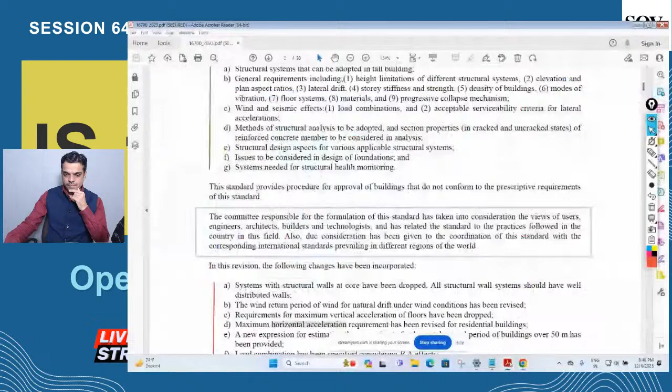Firstly, let's talk about the revisions or changes made in the document, which are highlighted here. Let's go through this quickly, then locate these parts in the document. One major change: the system with only core structural walls is dropped. Now the structural wall system should have well distributed walls only; there is no option of only core structural walls as was available earlier.

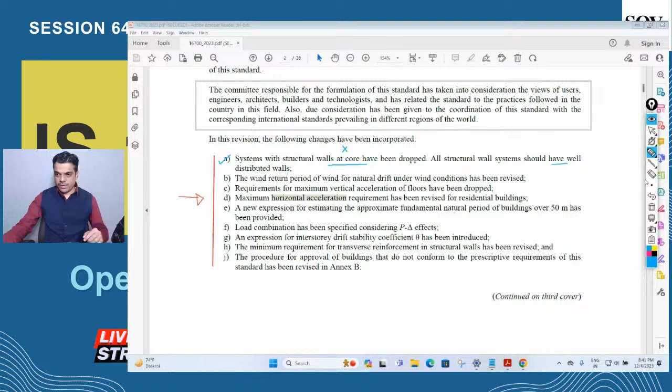Just let me fix this a bit. So as we were discussing, the core part of structural walls - only exclusively core walls are now not allowed. That is one of the changes.

Let's look at other changes. Second, the return period of wind for natural drift under wind conditions has been revised. Third, requirements for maximum vertical acceleration of floors have been dropped, which were there in the earlier part of the document. Maximum horizontal acceleration requirement has been revised for residential buildings. Part E is a major change - a new expression for estimating the approximate fundamental natural period of buildings over 50 meters has been provided, and we'll see this equation where there is no relation with reference to the base dimensions.

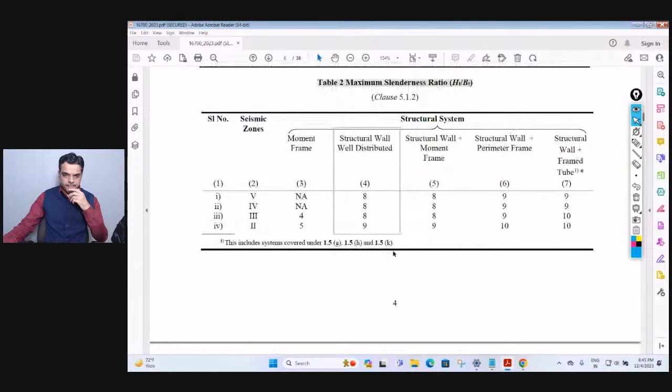Let's quickly locate a few parts where changes have been made. In this table, earlier the option was for core structural wall as well as a second option for structural wall which is well distributed. Now the core structural wall option is removed and is not allowed. It's mentioned here that structural walls are considered well distributed when structural walls outside of the core are capable of carrying at least 25 percent of the lateral loads - that requirement is specified.

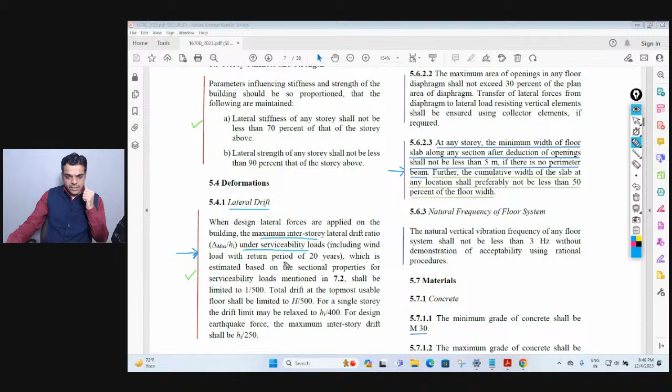For lateral drift, the maximum interstory lateral drift ratio under serviceability loads, including wind load with a return period of now 20 years, is estimated based on sectional properties - stiffness modifiers specified in 7.2. That shall be 1 divided by 500. I'm trying to locate the changes as I've studied this document, so please feel free to populate the chat with whatever additional things you've observed.

There's also another change regarding diaphragm action for earthquake resistant design. Now it's specified that at any story, the minimum width of floor slab along any section, after deduction of the opening, shall not be less than 5 meters. This clause applies when we do not have the perimeter beam - in that case, the minimum width of the floor slab along any section after deduction of the opening shall not be less than 5 meters.

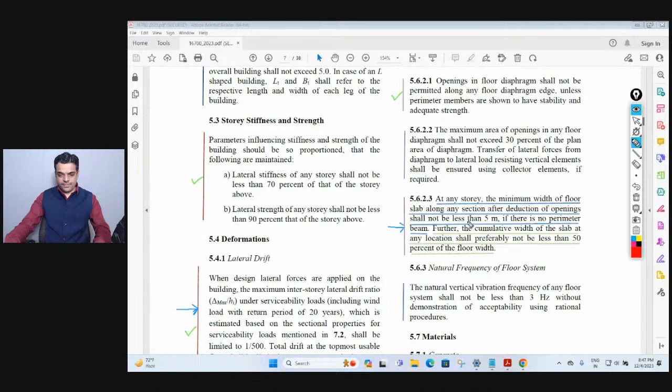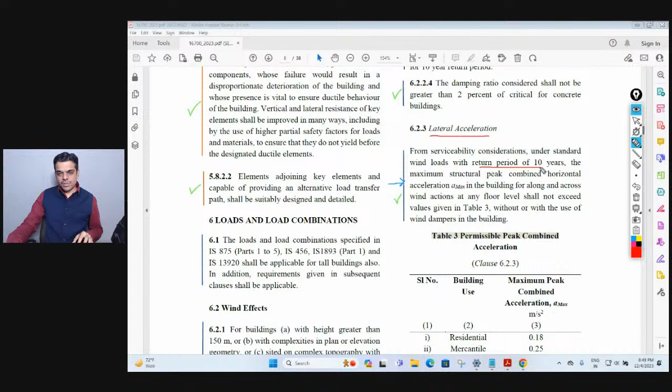Related to lateral acceleration, from serviceability considerations under standard wind loads with a return period of 10 years, the maximum structural peak combined horizontal acceleration in the building for along and across wind directions at any floor level shall not exceed the values given in Table 3. So Table 3 identifies the maximum allowable peak combined acceleration.

In para 6.3.2, it is said that for buildings in seismic zone 5, deterministic site specific design spectra may preferably be estimated and used in design. So it is said that it may be used, because of certain practical difficulties. It is recommended that we use deterministic site specific design spectra whenever buildings are located in seismic zone 5. But the statement has been updated, and it is now mentioned as 'may preferably be considered or estimated'.

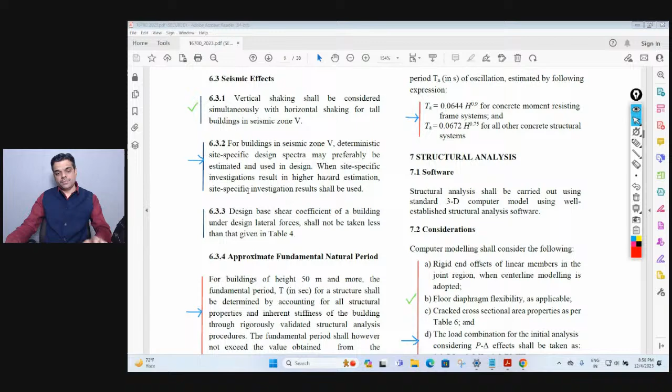Para number 6.3.4 is one of the major changes we can say, related to fundamental natural time period. As we were discussing in a number of sessions, our formulas related to time period in different Indian Standard Codes need to be revisited. Here also we could see that changes are proposed. For buildings greater than 50 meters, the recommended formula no longer has any dependency on the base dimensions. So this is one of the major changes made in this document.

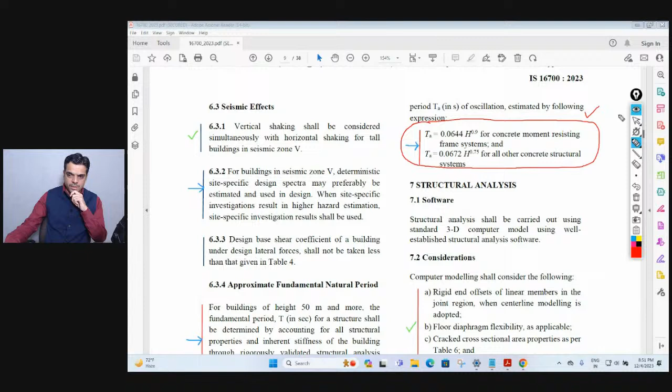Regarding P-delta analysis, as we discussed in the initial part of this session, there is always confusion related to P-delta analysis - what load combinations to consider and how it is to be considered in the software. That's a different point of discussion which we'll cover in detail in a separate session. But now there is a change made in the document wherein the load combinations are identified for P-delta analysis, which is nothing but 1.2 times dead load, 0.5 times live load, and 1.5 times either seismic load or wind load.

In para number 7.3.10, the flexibility of the building shall be such that the inter-story drift stability coefficient, denoted as theta, shall satisfy the following condition. The equation is given, and whatever value we derive out of this shall be less than or equal to 0.2. So this is also one of the changes.

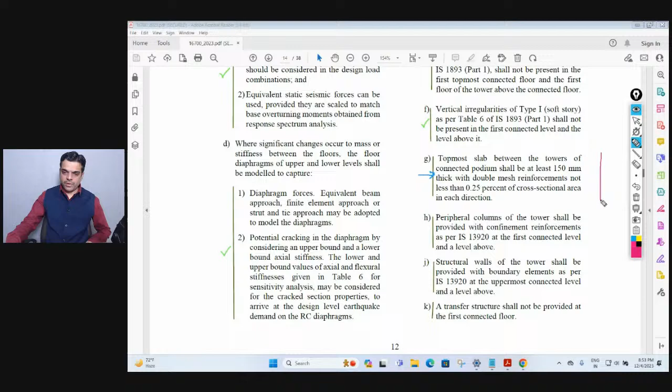I think here one change is made related to the topmost slab between towers of a connected podium, which shall be at least 150 thick with double mesh reinforcement, not less than 0.25 percentage cross sectional area in each direction.

Then in para number 8.5.13, it talks about reinforcement requirement for the structural wall. The minimum longitudinal reinforcement in the structural wall shall not be less than 0.4 percentage of the gross cross-sectional area. And the minimum transverse reinforcement in the structural walls shall not be less than 0.25 percentage of the gross cross-sectional area.

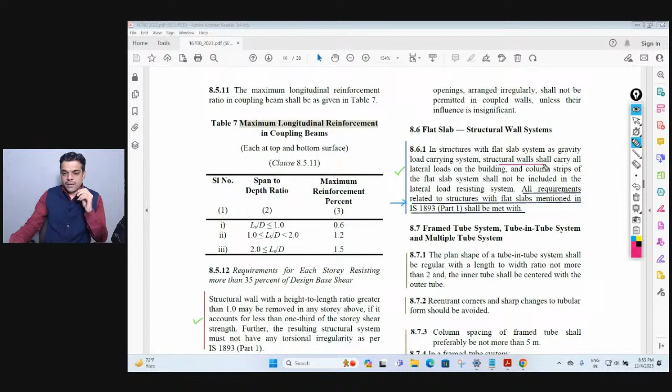Now we know that flat slab structures don't perform well during seismic events. So it's written very clearly here that wherever the structure has a flat slab system as the gravity load carrying system, the structural wall shall carry all lateral loads on the building, and the column strips of the flat slab system shall not be included in the lateral load resisting system.

But what is the change made in paragraph 8.6.1? Now it is said that all requirements related to structures with flat slabs, mentioned in IS 1893 Part 1, shall be met with. So the requirements related to drift, punching shear, etc., whatever is mentioned in IS 1893 Part 1, shall be considered while designing structures using flat slabs. So here reference is given to 1893 Part 1.

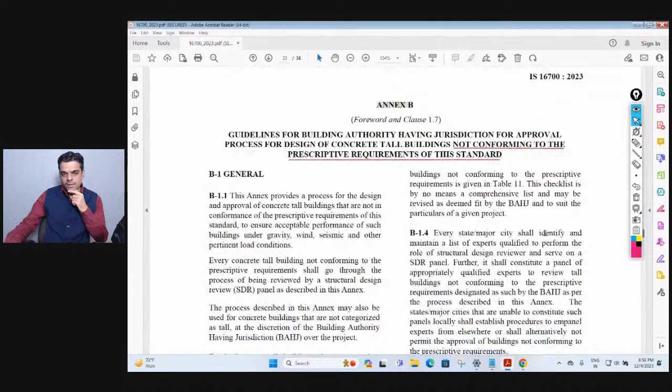The final change is in annexure B. Wherever a tall building is not meeting the prescriptive requirements of this document, earlier it was considered as a code-exceeding building or code-exceeding structure. But now that nomenclature is changed, and it is said that it's not conforming to the prescriptive requirements of this standard. So when the building doesn't meet the prescriptive requirements, the procedure outlined in annexure B has to be followed.

So now there are changes. One of the paragraphs related to performance-based design is now removed, as I could see, for more clarity. And it gives the overall or general process whenever a building is not meeting the prescriptive requirements.

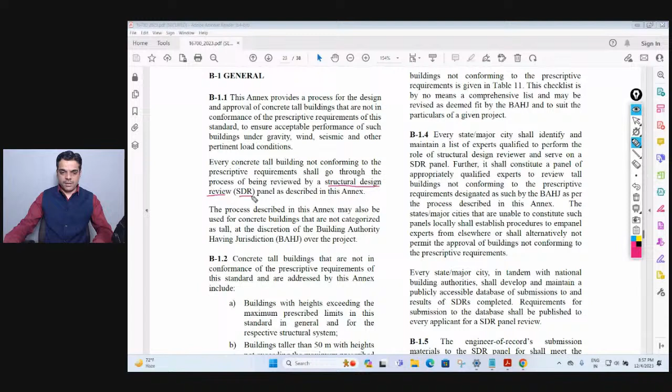One more change we could see here: two nomenclatures are given - SDR, the structural design review panel, and BAHJ, the building authority having jurisdiction. So everywhere these short forms are mentioned in the document. This is what I could gather as a quick overview of the changes made in this revised document.

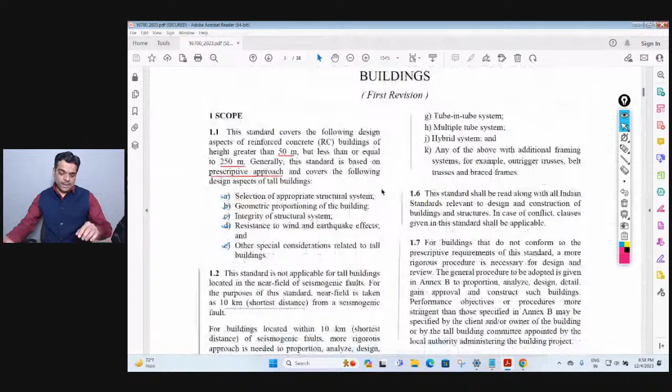Now let's move to the second part of our discussion, where let me highlight quickly the important points related to software applications while performing the design of tall buildings with reference to this document.

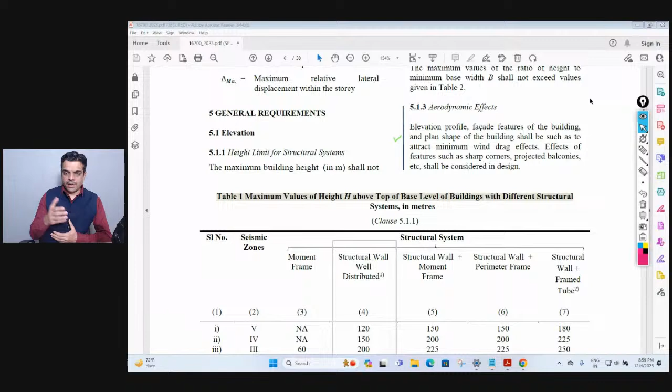As we discussed in the initial part of the session, we'll highlight a few of the important points which I have gathered while studying this document. We are still studying this document and will refine our list of those points. But right now, we'll just highlight the points which need to be considered from the software application point of view.

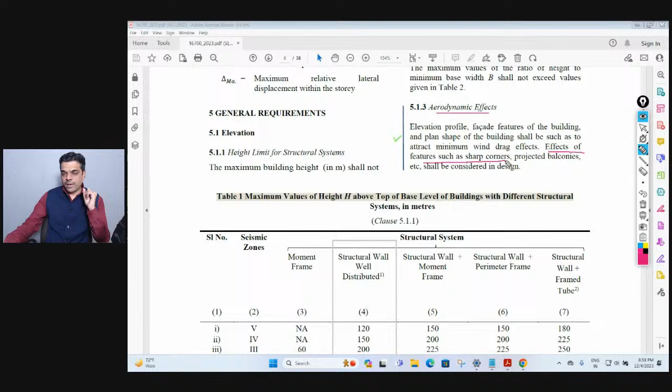Now, it's said that aerodynamic effects - when elevation, profile, facade features of the building, and plan shape of the building - shall be such as to attract minimum wind drag effect. Effects of features such as sharp corners or projected balconies shall be considered in the design. How it is to be considered, we'll discuss separately.

For story stiffness and strength, it is mentioned that lateral stiffness of any story shall not be less than 70 percent of that of the story above, and lateral strength of any story shall not be less than 90 percent of that of the story above. So we'll require this input from the software to meet the requirements of this paragraph.

Lateral drift, identified for wind as 1 divided by 500, and for seismic or earthquake force, it is hi by 250. This drift needs to be calculated considering the property modifiers or stiffness modifiers. So that's where software application will come into the point.

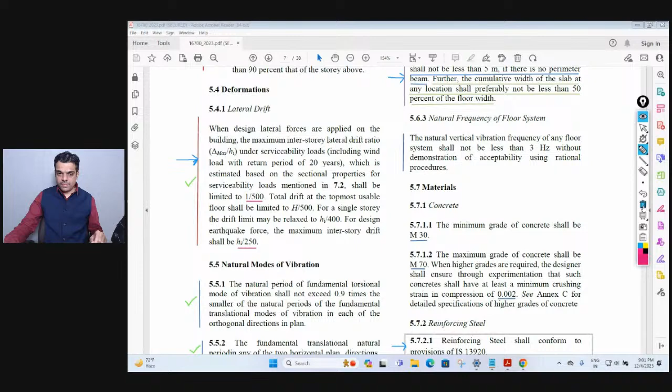Natural modes of vibration - as mentioned in paragraph 5.5.1, the natural period of the fundamental torsional mode of vibration shall not exceed 0.9 times the smaller of the natural periods of the fundamental translational modes of vibration in each of the orthogonal directions in plan. So in short, the torsional mode shape shall not be the first mode shape, and there shall be sufficient gap between the mode shapes. That's what is identified with reference to this 0.9 times factor. Software application will come into picture for this point.

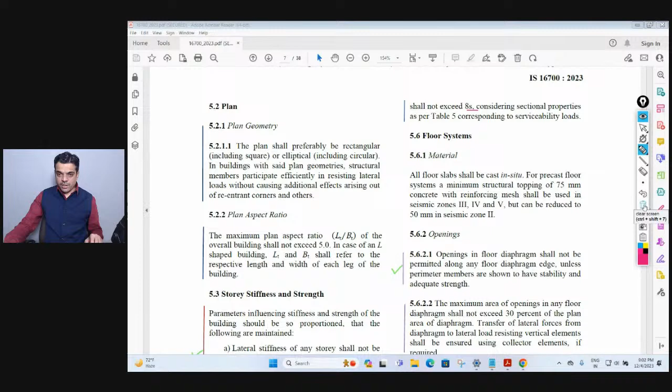And the fundamental translational natural period in any two horizontal plan directions shall not exceed 8 seconds. So an upper limit of 8 seconds is specified, considering the sectional properties as per table 5, corresponding to serviceability requirements.

When there are openings in the floor diaphragm - firstly, openings in the floor diaphragm shall not be permitted along any floor diaphragm edge specifically, unless the perimeter members are shown to have stability and adequate strength. This needs to be determined through software application, that the perimeter beams or perimeter members have adequate stability and strength whenever we have an opening in the diaphragm at the edge of the floor.

Then paragraph 5.8 is related to progressive collapse. It states that the possibilities of progressive collapse shall be precluded by selecting structural systems appropriate for ensuring structural integrity, adopting rigorous structural investigations that verify acceptable structural behavior even when select critical members do not play their intended role, and providing adequate redundancy and integrity to the structure. So here also, software applications will come into picture.

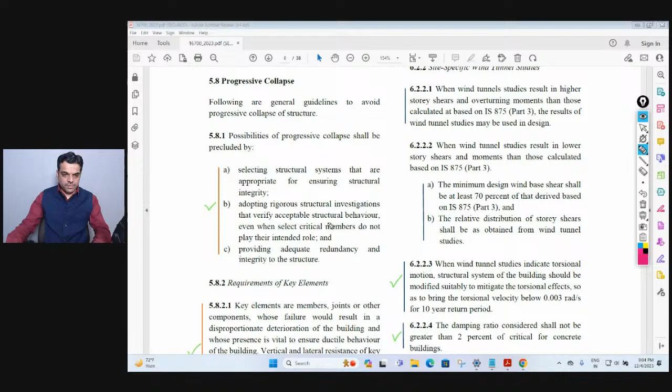And the key elements are identified, like these are the members which are defined in the earlier part of the document. And here it is said that whenever we have the key elements, so key elements are the members, joints, or other components whose failure would result in a disproportionate deterioration of the building and whose presence is vital to ensure ductile behavior of the building.

So vertical and lateral resistance of key elements shall be improved in many ways, including, let's say, by the use of higher partial safety factors for loads and materials to ensure that they do not yield before the designated ductile elements.

Right, so here software application will come into picture, and the elements which are adjoining key elements and capable of providing an alternative load transfer path, those members or elements shall be suitably designed and detailed, because in case of extreme seismic events, the forces could be transferred through the adjoining elements when the failure of key elements is triggered. So adjoining elements should be suitably designed and detailed.

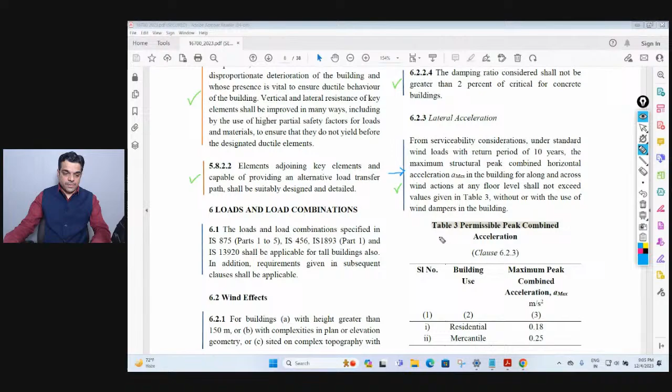When wind tunnel studies indicate that torsional motion occurs, the structural system of the building should be modified suitably. So whenever wind tunnel study is carried out, and if it is indicating torsional motion, the structural system should be modified suitably to mitigate the torsional effect, so as to bring the torsional velocity below 0.003 radians per second for a 10-year return period.

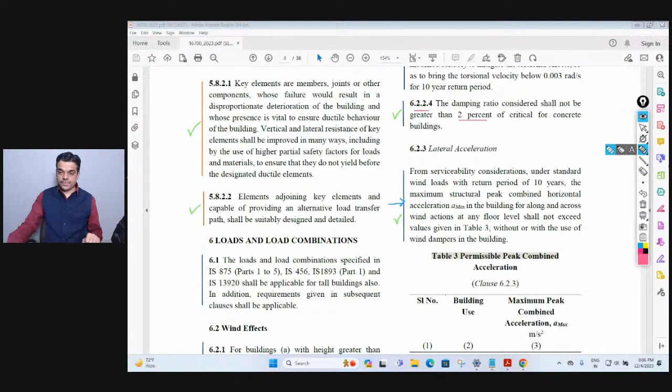The damping ratio is limited to 2% of the critical damping for the concrete buildings, or we can say for the tall concrete buildings, which have a height greater than 50 meters.

Lateral acceleration we just discussed in the initial part of the session. So these maximum allowable values we need to check with reference to, let's say, software calculations.

For the seismic effects specifically, vertical shaking shall be considered simultaneously with the horizontal shaking for tall buildings in seismic zone 5. So when a building is located in seismic zone 5, we need to consider vertical shaking also in combination with the horizontal shaking.

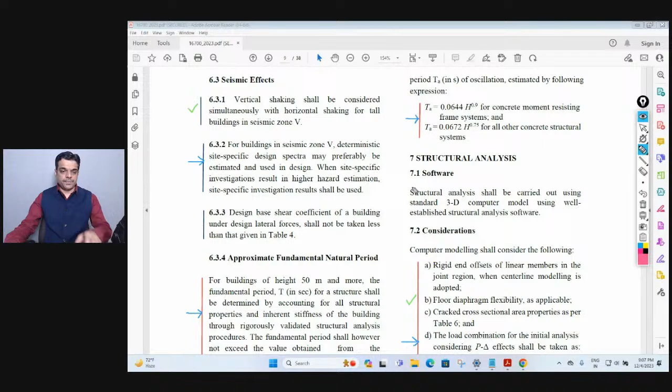The computer modeling shall consider the following: rigid end offsets of linear members in the joint region when centerline modeling is adopted - that's the first point. Floor diaphragm flexibility as applicable. Cracked cross-sectional area properties as per table 6. And the load combination which we just discussed for the P-delta effects - that is mentioned now.

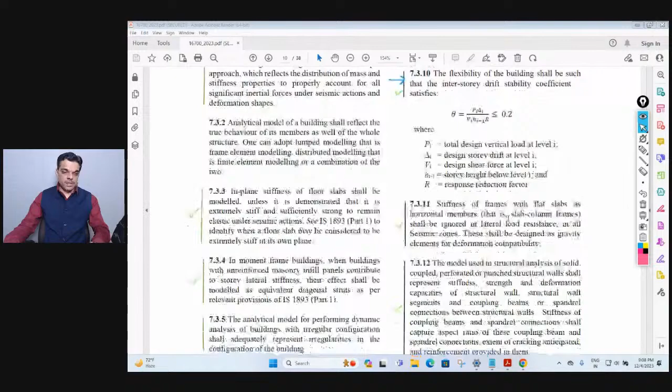Para number 7.3 is related to modeling. So many points will be applicable with reference to the software application, we can say. In para number 7.3.3, it says that in-plane stiffness of the floor slab shall be modeled unless it is demonstrated that it is extremely stiff and sufficiently strong to remain elastic under seismic actions.

Then it says that in moment frame buildings, when buildings with unreinforced masonry infill panels contribute to story lateral stiffness, then in that case we need to consider the stiffness which is provided by masonry infill in the form of equivalent diagonal struts, as it is defined in IS 1893 part 1.

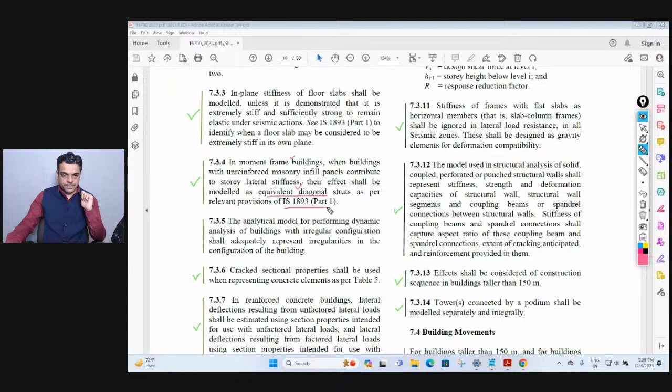Cracked sectional properties shall be used. So those are defined for strength criteria as well as for the serviceability criteria.

Then in para 7.3.7, in reinforced concrete buildings, lateral deflections which are resulting from unfactored lateral loads shall be estimated using section properties intended for use with the unfactored lateral loads. Similarly, if lateral deflections result from the factored lateral loads, we will use the section properties which are intended for use with the factored lateral loads. So now this is further clarified - how to consider the stiffness modifier, or when to consider which type of stiffness modifier.

Buildings may be considered to be fixed at their base for determining the lateral effects on the buildings. And when we are modeling the flexibility of the foundations, in that case, references shall be made to para number 8 and 9.

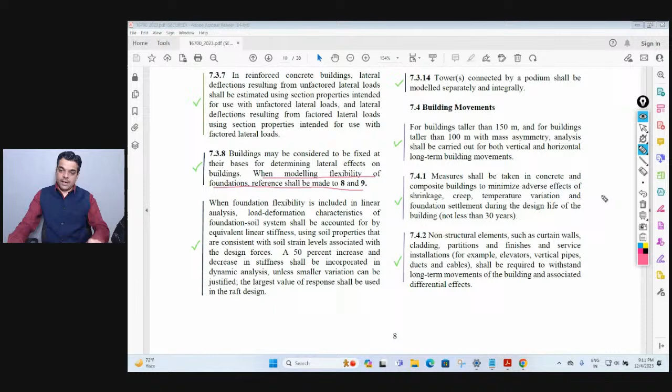And now, as it is mentioned in the next paragraph, when the foundation flexibility is included in the linear analysis, the load deformation characteristics of the foundation soil system shall be accounted for by equivalent linear stiffness using soil properties that are consistent with the soil strain levels associated with the design forces.

And one more important point which is made in this paragraph - a 50% increase and decrease in stiffness. So whatever stiffness we derive out of the method just mentioned above, we need to increase that stiffness by 50 percent and decrease the stiffness by 50 percent, and that shall be incorporated in the dynamic analysis unless a smaller variation can be justified. And of course, whatever largest value of the response we get out of this exercise, that should be considered for the raft design.

So here we can say that significant, or instead we can say, effective interface is required with the geotechnical consultant.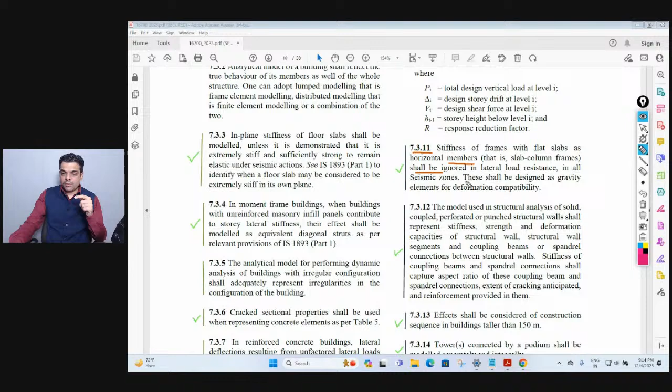Then para number 7.3.11, the stiffness of frames with flat slabs as horizontal members shall be ignored in lateral load resistance, as we just discussed in a different paragraph, but the same thing was mentioned. So in all seismic zones, the lateral stiffness or lateral load resistance shall be ignored by slab column frames, and this shall be designed as gravity elements for the deformation compatibility.

So for the deformation compatibility, there are clauses included in 1893 part 1 as well as in 13920. The same clauses may be referred for the deformation compatibility.

7.3.12, the model which is used in structural analysis of solid, coupled, perforated, or let's say punched structural walls, shall represent stiffness, strength, and deformation capacities of structural wall, structural wall segments, and coupling beams or spandrel connections between structural walls.

The stiffness of coupling beams and spandrel connections shall be captured based on aspect ratio of this coupling beam and spandrel connections, and extent of cracking anticipated and reinforcement provided in them. So this we need to take care of.

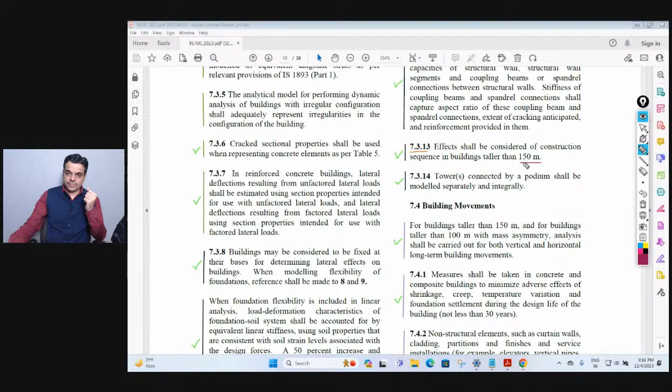In 7.3.13, it says that the construction sequence shall be considered whenever building height is greater than 150 meter. Then the towers which are connected by a podium shall be modeled separately as well as integrally.

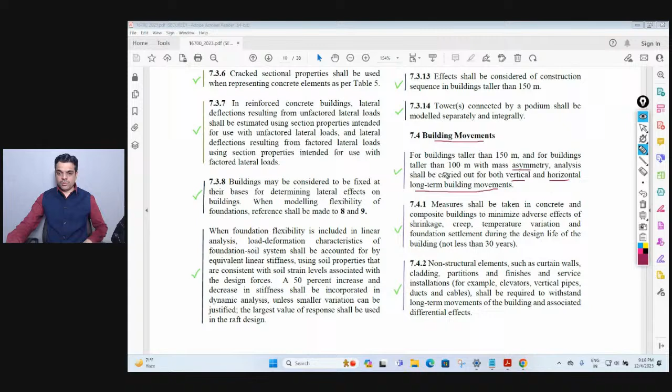7.4 paragraph is talking about building movements. So for buildings taller than 150 meter, and for buildings taller than 100 meter with mass asymmetry, analysis shall be carried out for both vertical and horizontal long-term building movements, which is very essential for tall buildings. That analysis needs to be carried out using software, right?

Then the measures shall be taken in concrete and composite buildings to minimize the adverse effects of shrinkage, creep, temperature variation, and foundation settlement during the design life of the building, not less than 30 years.

7.4.2 is talking about non-structural elements such as curtain walls, claddings, partitions, finishes, etc., and service installations, for example elevators, vertical pipes, shall be required to withstand long-term movements of the buildings and associated differential effects.

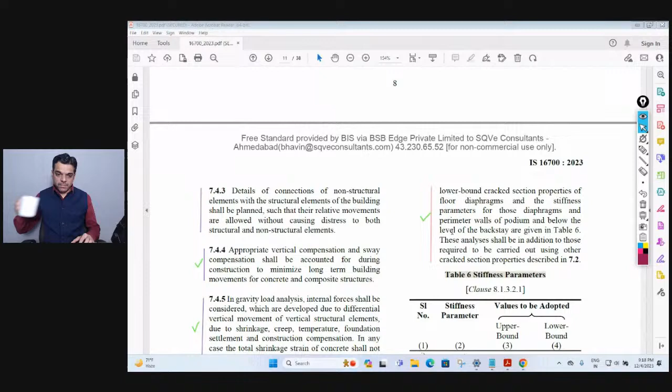So here it says that appropriate vertical compensation and sway compensation shall be accounted for during the construction. So once we calculate the building movement considering the long term condition, then the compensation shall be made accordingly for the vertical as well as the horizontal movement, or the sway compensation during construction.

In gravity load analysis, internal forces shall be considered which are developed due to differential vertical movement of the vertical structural elements due to shrinkage, creep, temperature, foundation settlement, and construction compensation.

And in any case, the total shrinkage strain of concrete shall not exceed 0.04 percentage. And to calculate the effect of creep and shrinkage, the selected strain prediction models of concrete shall be based on established principles of mechanics elaborated in specialist literature.

Because whatever building movements we calculate, which is a long-term building movement, the creep and shrinkage values we calculate shall be from the established or elaborated specialist literature. Otherwise, the whole calculation will go wrong.

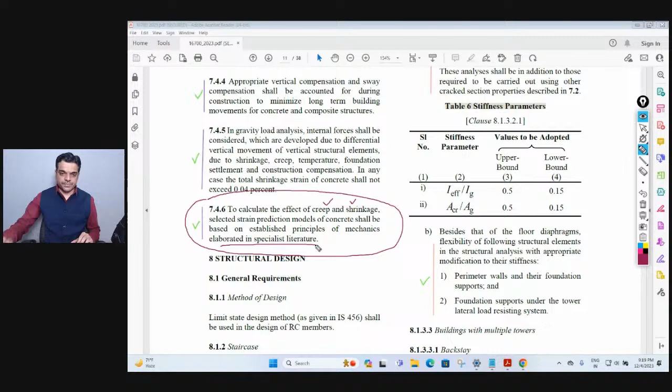For staircases, if it's built integrally with the structural system of the building, and if it is not confined by the structural walls, that shall be included in the three-dimensional structural model, and its elements designed as per forces induced in them under various load combinations. Alternatively, a sliding joint may be provided.

Okay, para number 8.1.3.2, and out of that 8.1.3.2.1 is talking about sensitivity analysis.

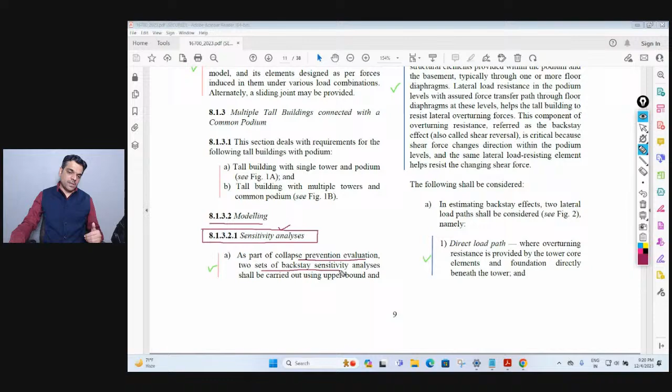So as a part of collapse prevention evaluation, two sets of backstay sensitivity analysis shall be carried out using upper bound as well as lower bound cracked section properties of floor diaphragms, and the stiffness parameters for those diaphragms and perimeter walls of podium and below the level of the backstay are given in table number 6. So these are the parameters, or let's say values, given for the upper bound as well as for the lower bound values.

So here software application will come in picture. Besides that of the floor diaphragms, the flexibility of the following structural elements in the structural analysis with appropriate modification to their stiffness: perimeter walls and their foundation supports first, and secondly, foundation supports under the tower lateral load resisting system.

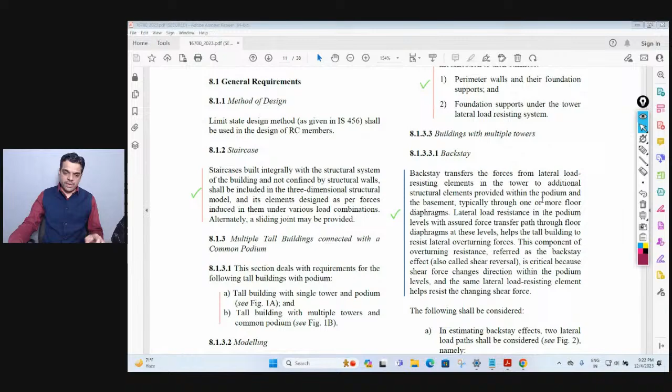Then there is a backstay analysis. So in the backstay analysis, as we know, we need to consider two different load paths. One is a direct load path, and the second will be the backstay load path. And the response quantities are to be calculated for these two different conditions.

Backstay floor diaphragms shall be modeled considering their in-plane and out-of-plane floor flexibility. And if there is any large discontinuity present in the slab, that shall be modeled as well.

In the direct load path case, the vertical stiffness shall be considered of the piles, foundation, and the supporting soil. In the backstay load path case, the relative stiffness shall be considered of the floor diaphragms and perimeter walls, along with the vertical in-plane rocking stiffness of soil below the walls. Also, horizontal pressure imposed by soil on the retaining wall shall be considered. At this point, the axial stiffness of elements along the load path shall be reduced to account for cracking, bond slip, interface slip, and other such effects.

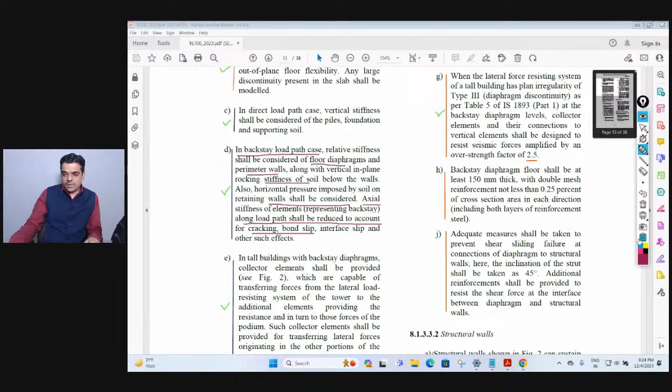So, the backstay diaphragm shall be designed in accordance with the following. They shall be designed for the maximum of the forces derived from the sensitivity analysis, as we just discussed.

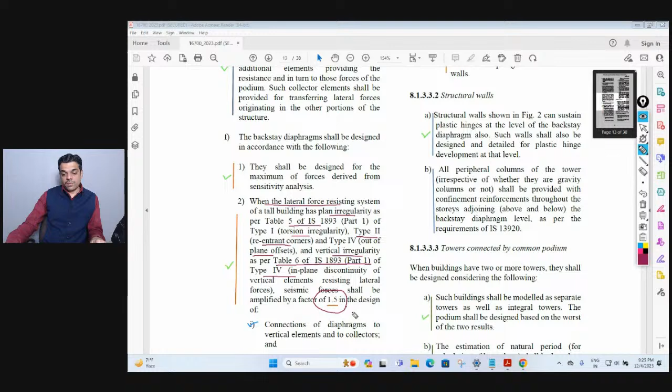When the lateral force resisting system of a tall building has plan irregularity as per table 5 of IS 1893 Part 1, of type 1 torsion irregularity, type 2 re-entrant corners, type 4 out-of-plane offsets, and vertical irregularity as per table 6 of IS 1893 Part 1 of type 4, which is in-plane discontinuity of vertical elements resisting lateral forces, the seismic forces shall be amplified by a factor of 1.5 in the design.

Similarly, when the lateral force resisting system of a tall building has plan irregularity of type 3, which is diaphragm discontinuity, as per table 5 of IS 1893 Part 1, at the backstay diaphragm levels, collector elements and their connections to the vertical elements shall be designed to resist seismic forces which are amplified by an overstrength factor of 2.5.

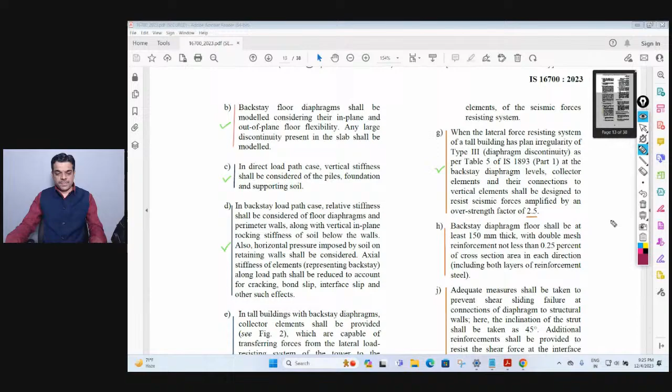Now, clause 8.1.3.3.2 for structural walls: structural walls or shear walls can sustain plastic hinges at the level of the backstay diaphragm also. So such walls shall also be designed and detailed for plastic hinge development at that level.

When towers are connected by a common podium, such buildings shall be modeled as separate towers as well as the integral tower, as we just discussed, and the podium shall be designed based on the worst of the two results. For estimation of the natural period for calculation of base shear, it shall be based on the individual building model.

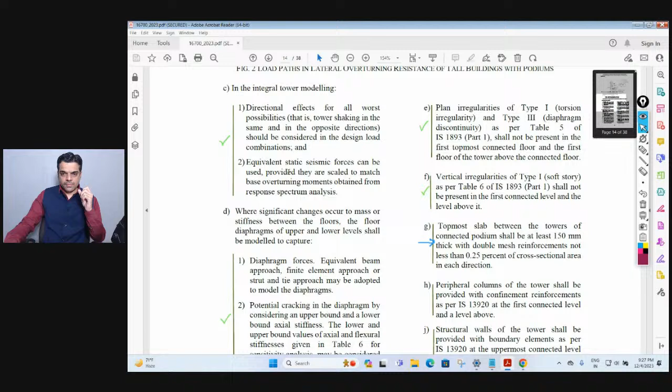So all those points we are discussing are related to software applications.

The directional effects for all worst possibilities, that is, towers shaking in the same direction or shaking in the opposite direction, should be considered in the design load combinations. Equivalent static seismic forces can be used, provided we are scaling those forces to match the same value of base overturning moment which we obtain from the response spectrum analysis.

Where significant changes occur to the mass or stiffness, the diaphragm forces equivalent beam approach, finite element approach, or strut and tie approach may be adopted to model the diaphragms.

The potential cracking in the diaphragm, by considering an upper bound or a lower bound axial stiffness, as just discussed, and the lower and upper bound values of axial and flexural stiffness as given in table 6 for the sensitivity analysis, may be considered for the cracked section properties to arrive at the design level earthquake demand on the RC diaphragms.

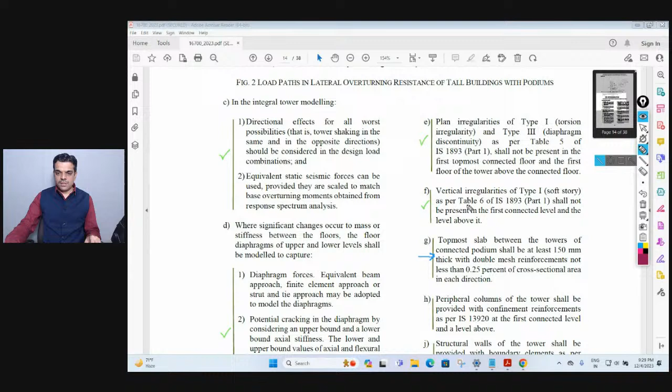Now, certain types of irregularity, such as torsional irregularity and diaphragm discontinuity, shall not be present in the first topmost connected floor and the first floor of the tower above the connected floor. Similarly, vertical irregularities of type 1 as per table 6 of IS 1893 shall not be present in the first connected level and the level above it.

The topmost slab between towers of a connected podium—so this we discussed, right, as a change.

The frame structural wall system shall be designed as a dual system. For the dual system, the requirement is mentioned in IS 1893 Part 1, so the same requirement needs to be considered.

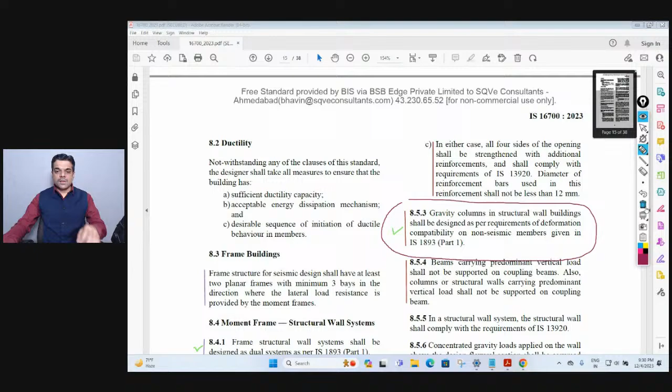The gravity columns in the structural wall buildings shall be designed as per requirements of deformation compatibility on non-seismic members. Basically, those shall be designed as a gravity column as it is defined in IS 1893 Part 1. So this is also one of the important points for software application, you can say.

The design of coupling beams shall comply with the requirements of IS 13920, unless it can be shown that loss of stiffness and strength of the coupling beam will not impair the vertical load carrying ability of the structure.

The requirement for each story resisting more than 35 percentage of the design base shear. So here it is said in para number 8.5.12 that structural wall with a height to length ratio greater than 1 may be removed in any story above if it accounts for less than one third of the story shear strength. And further, the resulting structural system must not have any torsional irregularity. That's the important part mentioned in the last part of this paragraph.

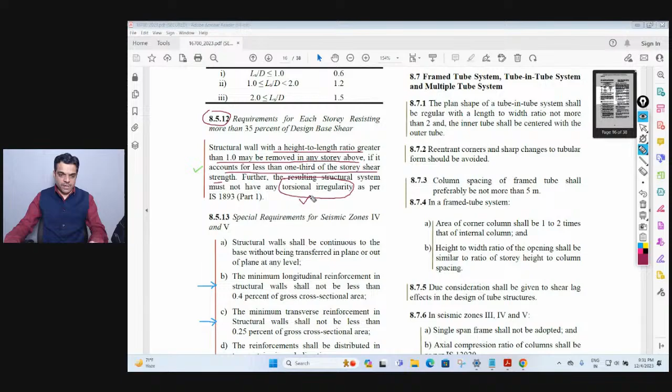Flat slab, we have discussed this part. For modeling of the soil also, we touched upon a couple of areas.

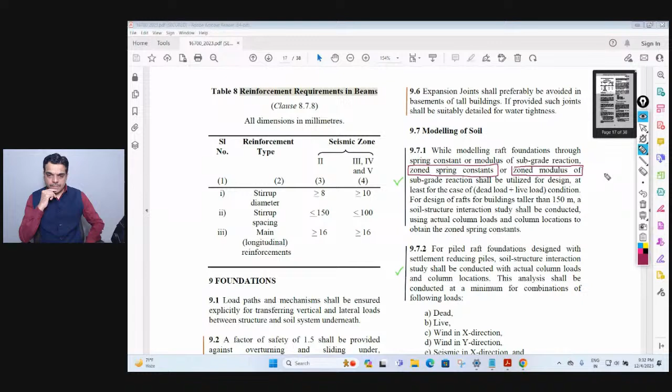Then, modeling of the soil. As we discussed, this requires effective interface with the geotechnical consultants. So while modeling the raft foundation through spring constant or modulus of subgrade reaction, we should look for zoned spring constant or zoned modulus of subgrade reaction. What does it mean? That the value of spring will not remain constant across the length of the raft. And that shall be utilized for the design, at least for the case of dead load plus live load condition.

And for design of rafts for buildings taller than 150 meters, a soil structure interaction study shall be conducted using actual column loads and column locations to obtain the zoned spring constants. And for piled raft foundations, designed with the settlement reducing piles, the soil structure interaction study shall be conducted with actual column loads and column locations, and this analysis shall be conducted at a minimum of following loads.

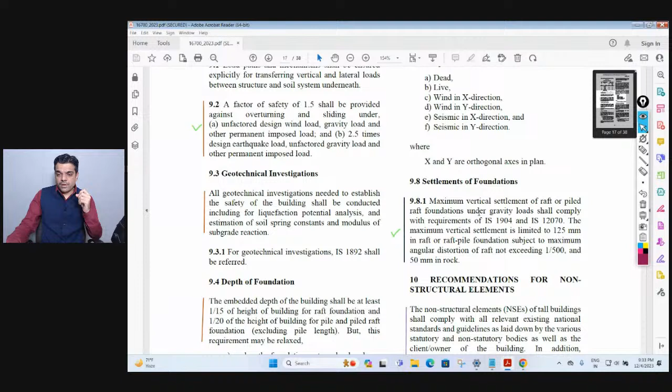The settlement of foundations are mentioned like maximum vertical settlement of raft or piled raft foundations under gravity loads shall comply with the requirements of specified standards, and the maximum vertical settlement is limited to 125 mm in the raft or raft pile foundation, subject to maximum angular distortion of the raft not exceeding 1 divided by 500, and 50 mm in rock.

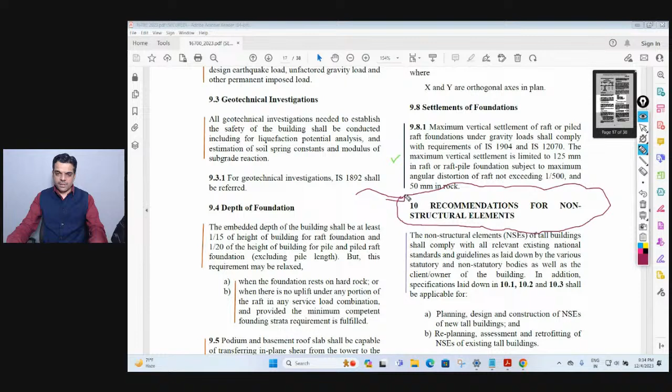This section is related to requirements for the non-structural elements. We will discuss this in a separate session. But there are no requirements specified for the non-structural elements, so it is said these are the recommendations. For these also, specific or detailed calculations are required.

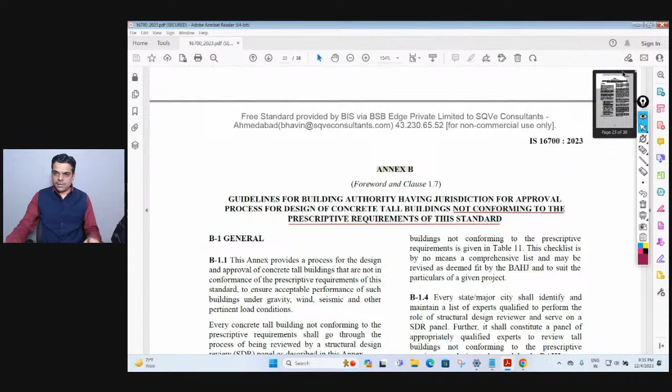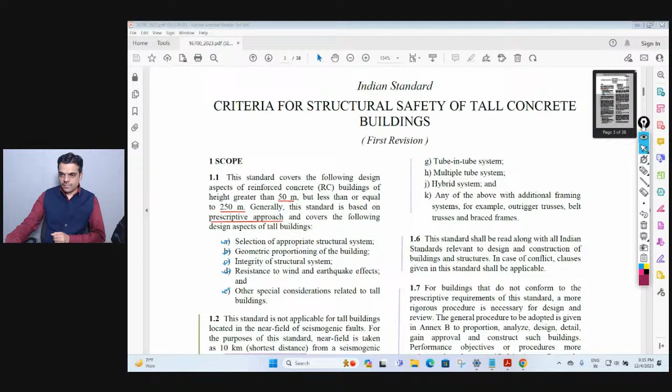Now let's come to the next part of our discussion, wherein let's touch upon a few of the remaining important parts of this document. Scope of any document is very important, scope as well as foreword. As we all know, this document will be applicable for buildings which are height lesser than 250 meters, between 50 meters to 250 meters. That's the range in which we'll consider this document. And this entire document is specifying a prescriptive approach.

Now this standard shall not be applicable for tall buildings if those are located in the near field zone. The definition for the near field zone, specifically for this standard, is considered as 10 kilometer shortest distance from a seismogenic fault. For those buildings, we need to consider the requirements mentioned in this part of the document, but additionally special requirements need to be considered, which is beyond the scope of this document. And that's why whenever a building is in such a zone, additional precautions shall be taken.

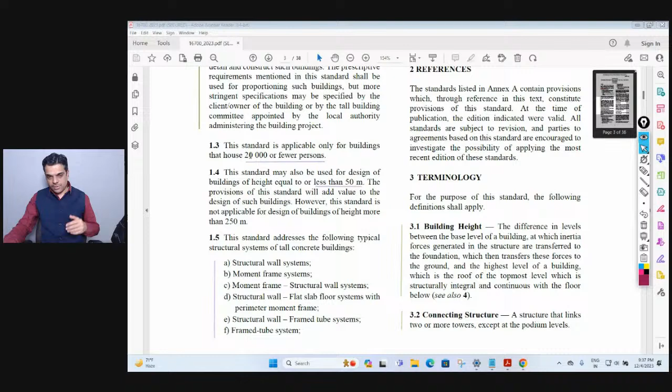And this is applicable for buildings that house 20,000 or fewer persons. If the number is higher than 20,000, this is not applicable, or the prescriptive requirements of these standards are not applicable, we can say.

This is very important, as we discussed during the session, that whenever buildings do not conform to the prescriptive requirements of this standard, a more rigorous procedure is necessary for the design and review. So the general procedure is outlined in Annexure B for such kind of buildings.

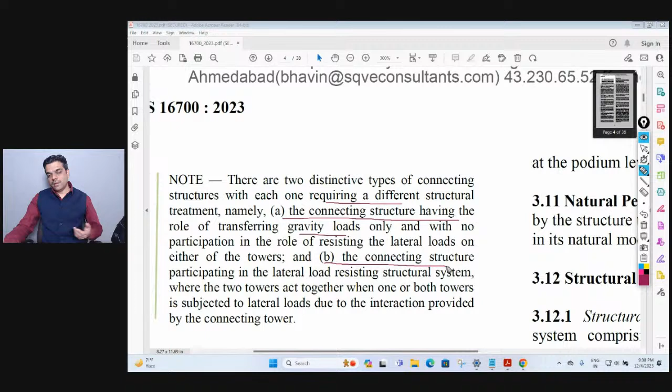For the connecting structure, there are two distinctive types, each requiring different structural treatment. First is the connecting structures having the role of transferring only gravity loads with no participation in resisting lateral loads. Second is where the connecting structure participates in the lateral load resisting structural system. In both cases, the treatment we give to the structure will be different.

The definition of key element is defined in paragraph 3.7, as we were talking about the requirements of key elements. So here, the definition is given for the key elements. And in this part of the document, in paragraph 3.12.5 onwards, it is identifying the different structural systems for tall buildings.

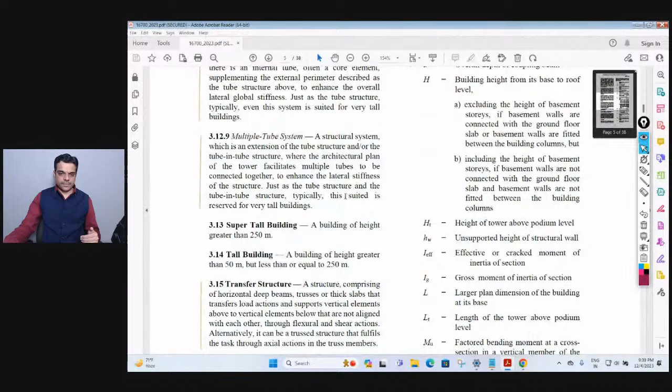Let's talk about transfer structure a little bit. A transfer structure is comprising of horizontal deep beam, trusses or thick slab, which will transfer the load action and support the vertical elements above, to vertical elements below that are not aligned. So when vertical elements are not aligned to each other at a particular level, those elements will be supported by a very deep horizontal beam. That's the transfer structure.

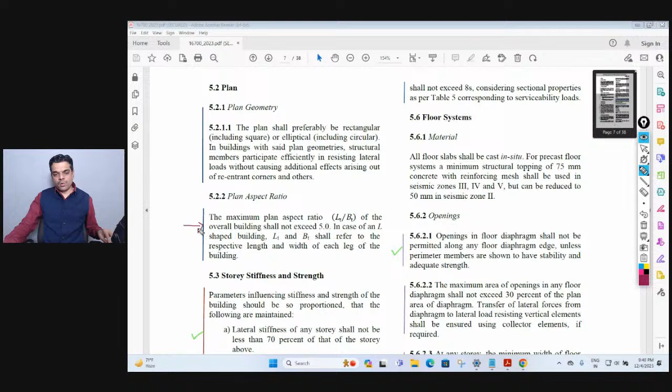The plan aspect ratio is identified: the maximum plan aspect ratio of the overall building shall not exceed 5. In case of an L-shaped building, LT and BT shall refer to the respective length and width of each leg of the building.

The natural vertical vibration frequency of any floor system shall not be less than 3 hertz. So when we perform dynamic analysis, we will get the frequency of the particular floor in the vertical direction, and that frequency shall not be less than 3 hertz.

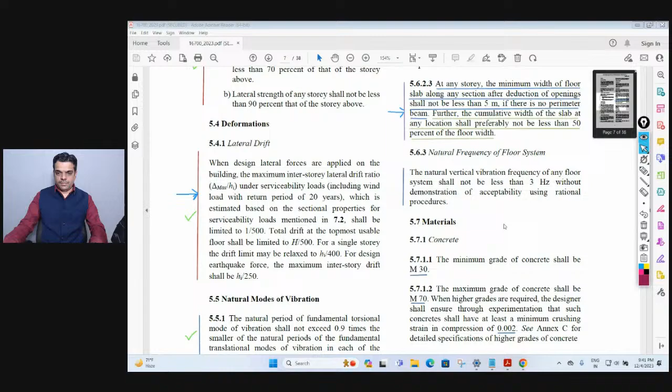For the wind effects, it is said that for buildings with height greater than 150 meters, this paragraph, in para 6.2.1, identifies requirements of wind tunnel testing. So when the height is greater than 150 meters, or with complexities in the plan or elevation geometry, or sited on complex topography...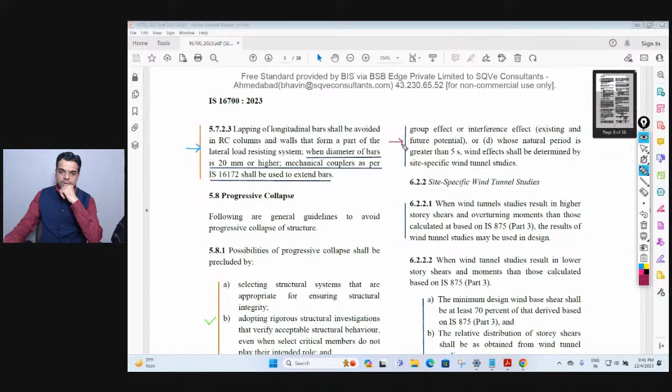With the group effect or interference effect, let's say because of adjoining structures or buildings, there is a possibility of interference effect. That interference effect may be existing or future potential, where tall buildings or other facilities are likely to be constructed, or whose natural period is greater than 5 seconds. So in all these different conditions, if any condition is meeting or applicable, then wind effects shall be determined by site specific wind tunnel studies.

There may be two cases when we go for wind tunnel studies: the results may be higher or lower with reference to the wind force calculations as per IS 875 part 3. For both cases, the methodology is given here.

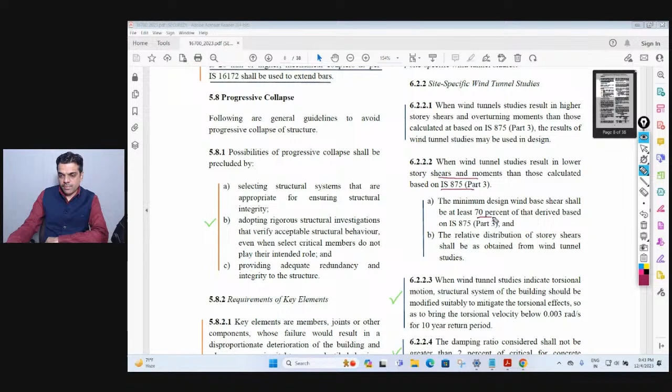Whenever the wind tunnel studies are lower than the shear and moments as per IS 875 part 3, in that case, the minimum design wind base shear shall be at least 70 percent of that derived based on IS 875 part 3. The minimum design based shear coefficient is defined in table number 4.

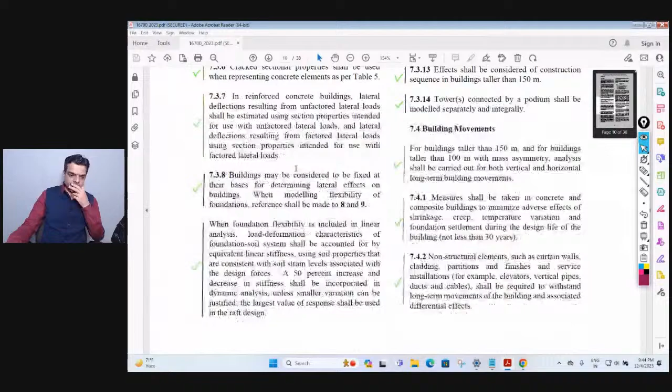As said in para number 7.4.3, the details of components or connections of non-structural elements with the structural elements of the building shall be planned such that their relative movements are allowed without causing distress to both structural and non-structural elements.

This we have seen already.

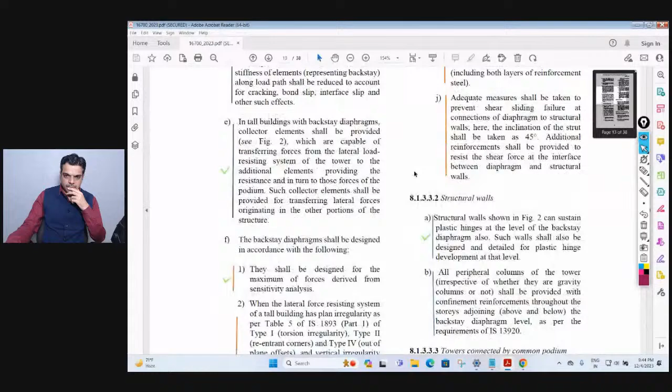For the backstay effect, we will have a separate session because there are also few points I could see from the registration form. But we'll discuss these in detail along with the software application.

So I'm highlighting a few of the remaining points, or important parts of the document, after covering major changes as well as software application points.

One of the points is: frame structure for seismic design shall have at least two planar frames with minimum three bays in the direction where the lateral load resistance is provided by the moment frames.

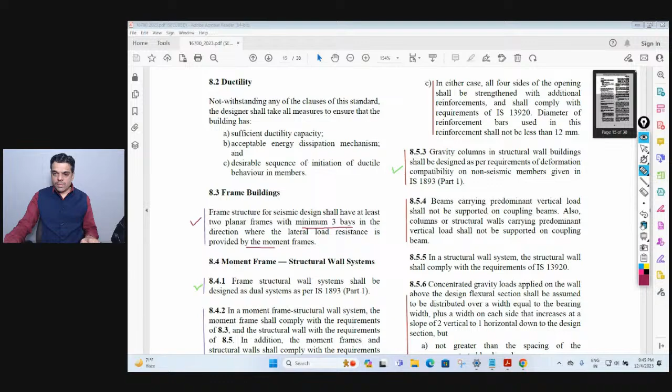The thickness of the structural walls shall not be less than 160 mm or hw by 20, whichever is greater. But we need to relook at this thickness according to me from the constructability aspect. So 160 mm is always the minimum value.

In paragraph 8.5.2, how the openings in the structural walls are to be considered or taken care of is mentioned here. And beams carrying a predominant vertical load shall not be supported on the coupling beams.

Okay, here it is identifying the limit for nominal design shear stress, which shall be limited to 0.5 tau c max in the structural walls under tension in any load combination, and coupling beams in structural walls under factored design loads.

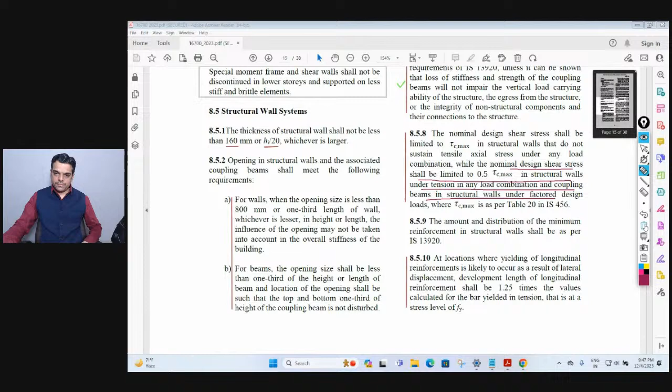And wherever yielding is possible or likely to occur, we need to consider the longitudinal reinforcement development length, which shall be 1.25 times the values calculated for the bar yielded in tension.

Okay, in para number 8.7, it's talking about framed tube system, tube-in-tube system, and multiple tube systems. So those requirements can be referred here.

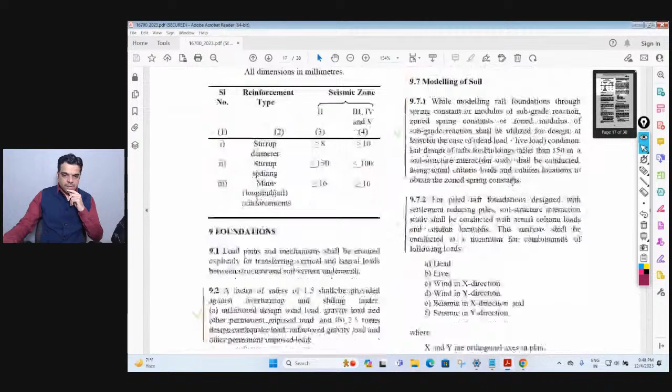Modeling of soil, we have seen depth of foundations. For depth of foundation, there's a paragraph stating the embedded depth of the building shall be at least 1 by 15 of the height of the building for raft foundation, and 1 by 20 of the height of the building for pile and piled raft foundation.

And when the foundation is resting on hard rock, or when there is no uplift under any portion of the raft in any service load combination, and provided the minimum competent founding strata requirement is fulfilled, only then can these requirements be relaxed. Otherwise, the depth of the foundation should be considered as it is mentioned here.

The podium and basement roof slab shall be capable of transferring in-plane shear from tower to the foundation. And para 10 is talking about recommendations for the non-structural elements.

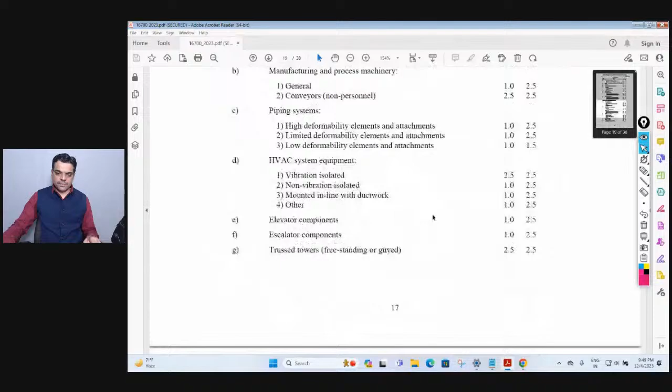And para number 11 is actually talking about monitoring deformations in the building. So that's very important, according to me. The monitoring is extremely important - whatever design we have performed, building is executed, and then...

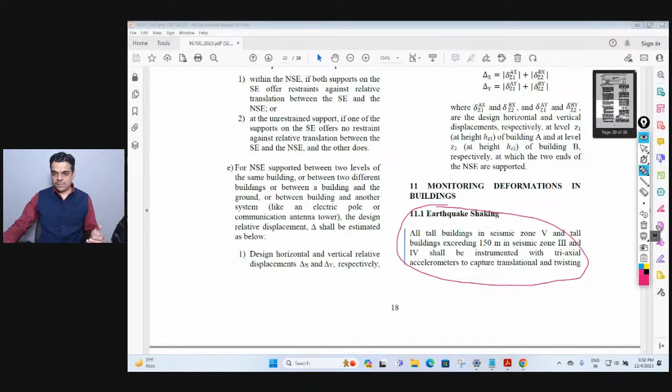the earthquake strikes, or occurs at that particular site where the building is located, or there is a wind velocity which is increased. So in that case, if we have instruments placed in the building, we can record the movement of the building, and with that kind of database, we can further improve our codal provisions. So I think this is a very important part.

So it's talking about measurement for the earthquake shaking, then for the wind oscillations, and also for the foundation and settlement pressure measurement.

So whatever we have considered during the design stage, with effective interface with the geotechnical consultant, and whatever long term deformation or long term settlement we have conceived - now what is the actual settlement which is happening, on a year to year basis? That can be monitored, and that will give more confidence and more data to us for refining our industrial practices.

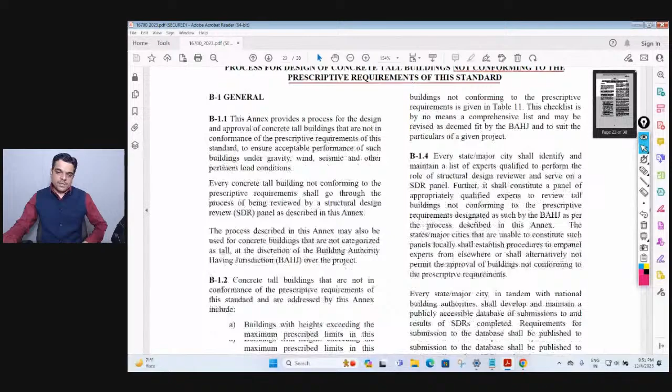And annexure B, as we just talked, will be applicable when the building is not meeting the prescriptive requirements of the standard. So it gives a broad outline of how the step-by-step approach should be followed.

Now, in the entire process, it is only a generic format which is given here. So this checklist, when we look at it, is only a generic checklist. It is not comprehensive - rather, it is in fact mentioned here also that this checklist is generic.

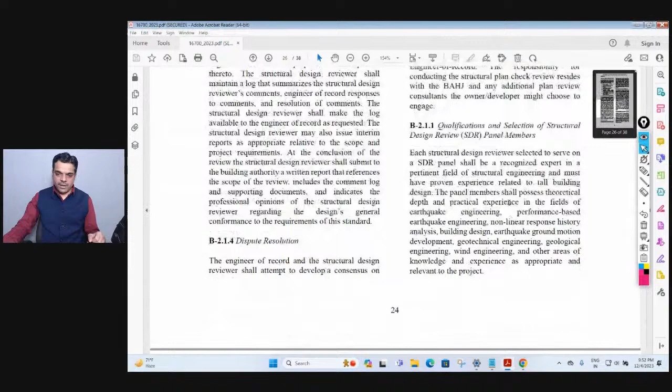So accordingly, the detailed checklist should be prepared for the structure under consideration, and based on that, whether the code is complied with or not should be mentioned. So it is written in a fairly detailed manner, of course. This is the last part of this document, which is annexure B.